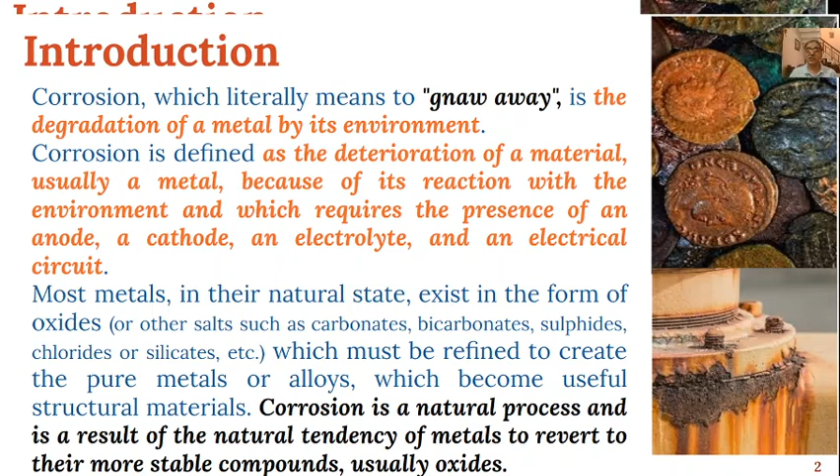In the refining process, the metal ore, which is a thermodynamically stable state, undergoes refining with energy provided to the system, which creates pure metals. But these pure metals are thermodynamically unstable compared to their ores. So with the passage of time, these metals undergo corrosion to produce corroded metals, because these corroded metals are a thermodynamically more stable state than the pure metal. That is why corrosion is a natural phenomenon which takes place in various types of metals.

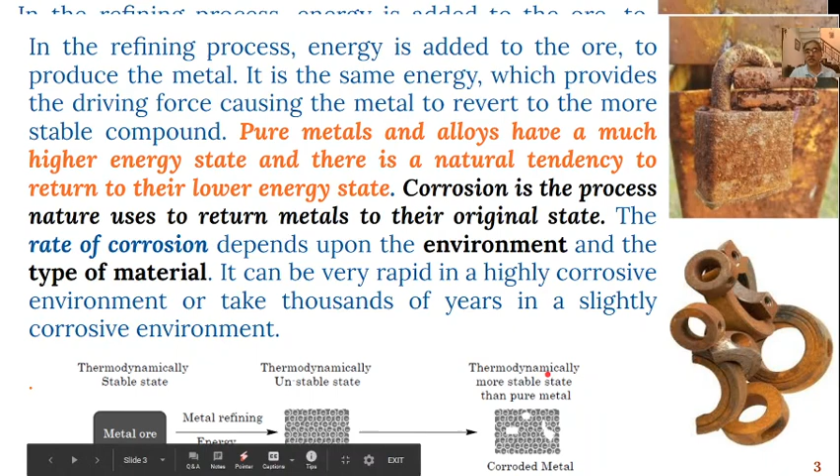Corrosion can be very rapid in a highly corrosive environment, or it may take thousands of years in a slightly corrosive environment. So how much time a metal will take to get converted into a corroded metal will depend upon the environment in which the corrosion reaction takes place, and it will also depend upon what type of metal it is.

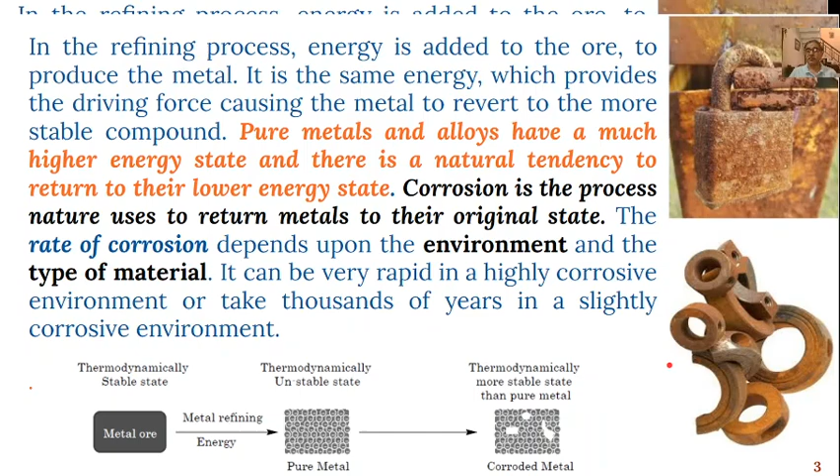Then, the economic impact of corrosion. Recently in 2019 in India, it has been said that corrosion and poor maintenance were the major causes of the toxic gas leak in the Union Carbide pesticide plant in Bhopal, which we all know as the Bhopal gas tragedy.

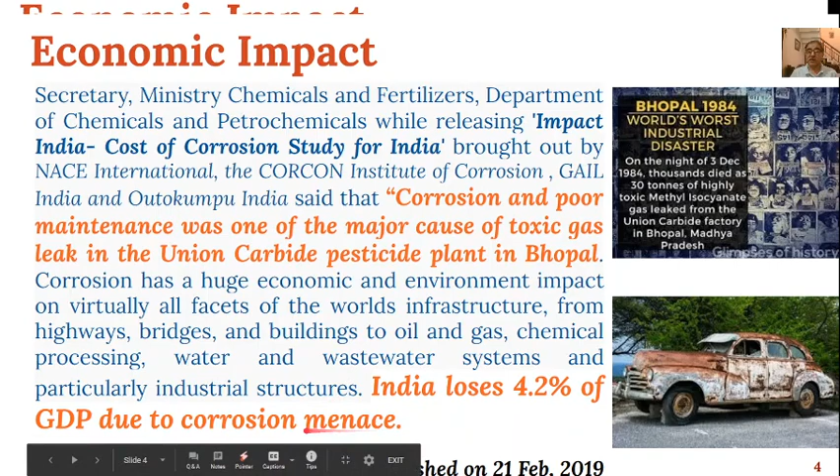Because of this, corrosion has a huge economic and environmental impact on virtually all facets of world infrastructure, from highways, bridges, buildings, to oil and gas, chemical processing, water and wastewater systems. India loses about 4.2% of its GDP due to corrosion, such is the high economic impact of corrosion on the Indian economy. Similarly, globally, it has been estimated that up to 5% of the world GDP is lost due to corrosion.

Then the causes of corrosion: mainly three types of corrosion take place. One is electrochemical corrosion, which we also call wet corrosion. Then chemical corrosion, which is known as dry corrosion. And the third category is acidic corrosion.

In case of electrochemical corrosion, it is similar to the phenomenon which takes place when a carbon zinc dry cell generates a direct current. Basically, in electrochemical corrosion, there must be present an anode, that is the negative electrode, a cathode, that is the positive electrode, and an electrolyte, which is the environment in our case, and then a circuit should connect the anode and the cathode, and only then the corrosion will take place.

So basically what happens is that the metal atom at the surface, due to the presence of moisture, undergoes oxidation to give us metal ions and electrons. These electrons, which are produced on the surface of the metal, are removed by the depolarizer. Depolarizer means the species which can accept electrons, and because of the acceptance of electrons by the depolarizer, corrosion is caused. The main depolarizers are oxygen and acid.

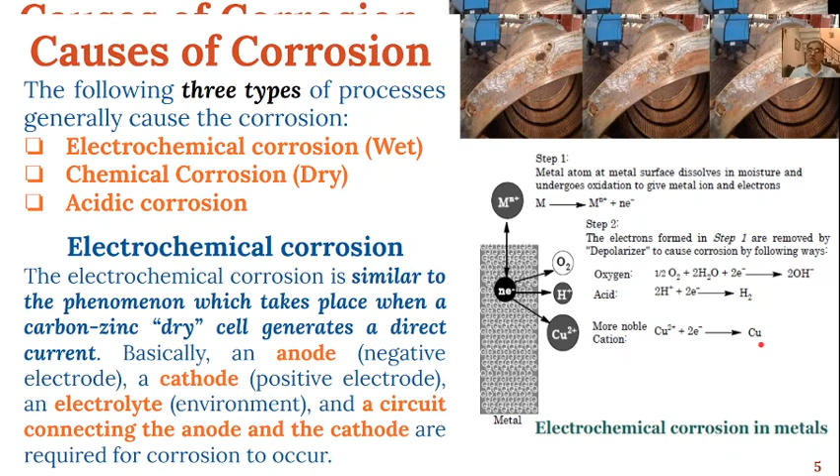Then in case of more noble cations, the electrons will be taken up by those more noble metals, and the metallic surface can be restored also.

The chemistry of electrochemical reaction is such that there must be a short circuit of the electrochemical cell present, only then can electrochemical corrosion take place, and dissolution of the metal will occur at the anode, whereas corrosion current enters the electrolyte and flows to the cathode.

For example, if we take the case of iron, when iron is exposed to corrosive or aerated water, the anodic reaction will be that iron metal changes into ferrous (2+) ions, producing 2 electrons. At the cathode, in the presence of oxygen and water, these electrons are converted into hydroxide ions. Since there cannot be any gain or loss of electrons, 2 atoms of iron must dissolve to provide the 4 electrons required at the cathode. So 2 atoms of iron metal produce 2 ferrous ions and 4 electrons, and these 4 electrons at the cathode produce 4 hydroxide ions.

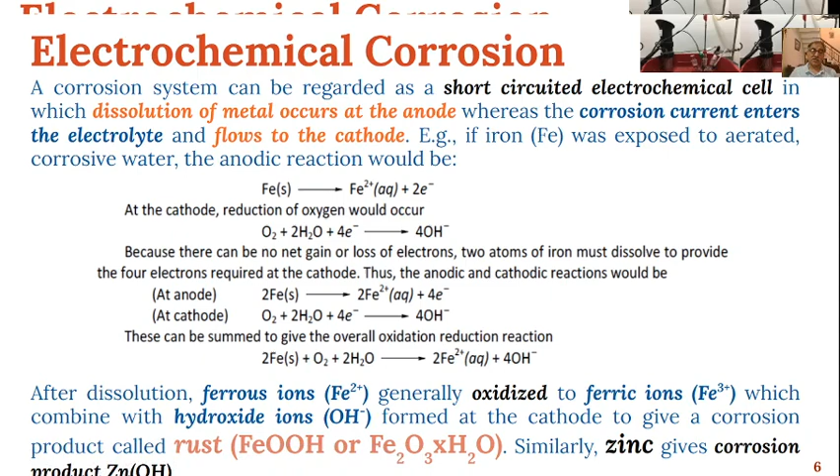Rust is the product of oxidation of iron metal. Similarly, zinc also undergoes corrosion to give zinc hydroxide as the product of corrosion.

Then there is chemical corrosion, or dry corrosion. Dry corrosion is mainly caused due to the direct reaction of metal surfaces with atmospheric gases present in the environment. The most common gases which interact in chemical corrosion are oxygen, carbon dioxide, hydrogen sulfide, sulfur dioxide, nitrogen, chlorine, and other halogen gases.

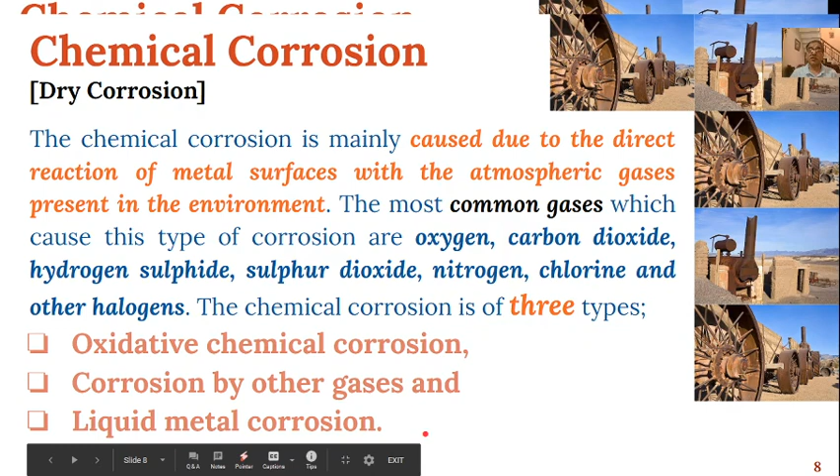This chemical corrosion is of three types: oxidative chemical corrosion, corrosion by other gases, and liquid metal corrosion. Oxidative chemical corrosion is caused by direct reaction of atmospheric oxygen with metals, generally in the absence of moisture. So in oxidative chemical corrosion there are no water vapors present, and that is why it is also called dry corrosion.

The metals which generally undergo this type of chemical corrosion are alkali metals and alkaline earth metals, which are quickly oxidized even at low temperatures, whereas all other metals except gold, silver, and platinum are oxidized at high temperature. So what happens is first the surface of the metal is oxidized, producing electrons and metal ions. These electrons interact with atmospheric oxygen to form oxide ions, and those oxide ions react with metal ions to give a layer of metal oxide at the surface of the metal, and hence corrosion of the metal takes place.

At the surface there will be formation of a layer of metal oxide, leading to a corroded metal. Then, when the entire surface of the metal is covered with metal oxide, further oxidation is restricted. This means if the metal oxide layer is a stable one, further corrosion will be restricted once the whole surface of the metal is covered with the metal oxide.

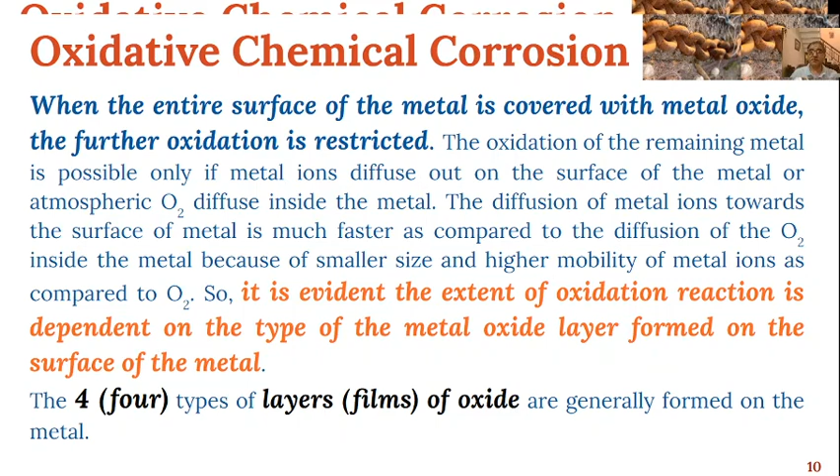It has been seen that generally there are four types of oxide layers which form on the surface of the metal. The first category is a stable layer. A stable layer of metal oxide means this layer is an impermeable coating on the surface of the metal, which restrains the penetration of atmospheric oxygen into the metal.

Once the metal oxide layer has been formed on the surface of the metal, no penetration of atmospheric oxygen can take place inside the metal, and corrosion will stop at that stage. The metals where this type of layer formation commonly takes place are aluminium, lead, copper, and tin. So the formation of a stable coating on the surface of the metal prevents further oxidation or further corrosion.

The second type is unstable oxide layers formed on the surface of the metal. In this type of layer formation, the oxide layer formed will decay to give metal and oxygen. So the metal oxide layer which has been formed, with passage of time, changes into metal ions and oxide ions again, and then metal is formed and oxygen goes back. This layer decays with time, and pure metal is generated back. Here the corrosion is a reversible process, in cases where the layer formed is unstable.

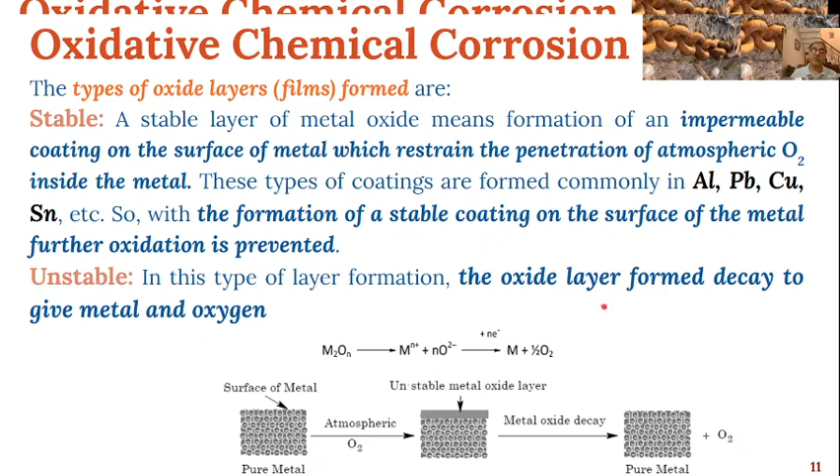Then third is where the layer is a volatile layer. In this type of oxide layer formation, after some time the layer volatilizes as soon as it is formed. That means once it has been volatilized, a fresh surface of the metal is exposed to further corrosion. So formation of a volatile layer of metal oxide causes rapid and continuous corrosion till the whole metal is corroded. This is a very severe type of corrosion.

An example is molybdenum oxide formation, which occurs in case of molybdenum metal. First, the metal reacts with atmospheric oxygen and forms a volatile metal oxide, which goes into the atmosphere, exposing another surface of the metal to further corrosion, and ultimately the whole metal will be corroded and destroyed.

Then the fourth category is porous layer formation. The oxide layer formed has pores through which atmospheric oxygen can pass through into the metal, penetrating the surface, and corrosion continues till the whole metal is converted into metal oxide. First, the pure metal interacts with atmospheric oxygen and a porous metal oxide layer is formed, and this goes deep into the metal. The quantity of metal oxide formation goes on increasing, and ultimately the whole metal is converted into metal oxide. This is also a severe type of corrosion.

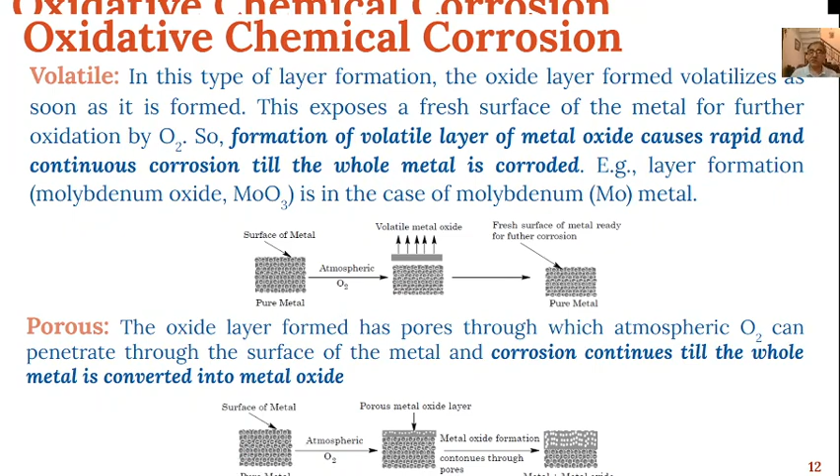The next topic is the Pilling-Bedworth rule. As we have seen, there are four types of oxide layer formations, and these can be categorized into protective or non-protective oxide layer formation in case of metals. This is governed by a rule known as the Pilling-Bedworth rule.

According to this rule, if the volume of the oxide is equal to or greater than the volume of the metal from which it is formed, the oxide layer is non-porous and therefore protective in nature. When it is non-porous, atmospheric oxygen cannot penetrate through the surface of the metal, so this will not lead to further corrosion. Therefore, this layer is protective in nature, and such a layer is found in case of oxides of copper, indium, aluminium, nickel, and chromium.

Similarly, if the volume of the oxide is less than the volume of the metal from which it is formed, then the oxide layer is porous and will be non-protective in nature. This means the oxide layer formed will be porous, and atmospheric oxygen will get into the metal, and the volume of the oxide layer will go on increasing. Ultimately the whole metal is destroyed, and this type of layer formation takes place in case of alkali metals and alkaline earth metals. This rule is known as the Pilling-Bedworth rule.

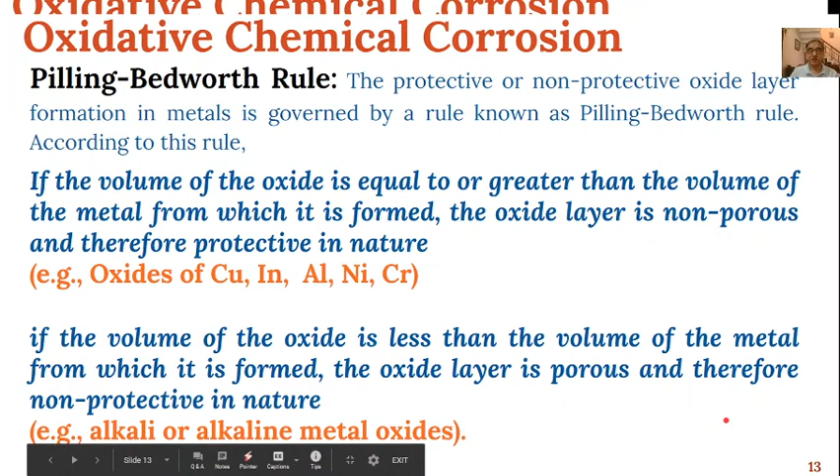Then corrosion by other gases. This type of corrosion is caused by gases other than oxygen, like carbon dioxide, H2S, sulfur dioxide, nitrogen, chlorine, and other halogens. All these gases can also cause corrosion to the metals. But the extent of corrosion depends on the affinity between the gas and the metal, and what type of film is formed on the surface of the metal, whether it is protective or non-protective, porous or non-porous.

In these types of corrosion, the extent of corrosion decreases if the layer formed is protective or non-porous. An example is the attack of chlorine gas on silver metal. This forms a non-porous layer of silver chloride, which is a protective layer, and it protects the silver metal from further corrosion.

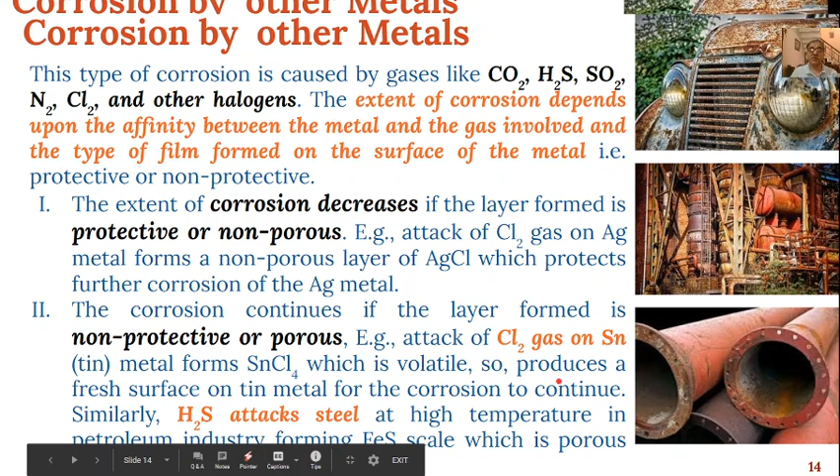Corrosion continues if the layer formed is non-protective or porous. The attack of chlorine gas on tin metal is an example of this type of corrosion. Here, the metal reacts with chlorine gas to form SnCl4, which is a volatile substance. It goes into the atmosphere and produces a fresh surface on the tin metal, and corrosion continues till the whole metal is destroyed by corrosion.

Then is liquid metal corrosion. Liquid metal corrosion is caused due to chemical reaction of solid metal with a flowing liquid metal at very high temperatures. So such type of corrosion is caused by these flowing liquid metals, and it always takes place at high temperature. An example is such corrosion takes place in case of nuclear power production.

So these are the factors which affect liquid metal corrosion: temperature, temperature gradient, cyclic temperature fluctuation, then surface area to volume ratio between the solid metal and the flowing liquid metal. Then chemical purity of the liquid metal which interacts with the solid metal. Then flow velocity, surface conditioning, other material in contact with the same liquid metal, and condition of the container material. So all these factors determine the extent of liquid metal corrosion.

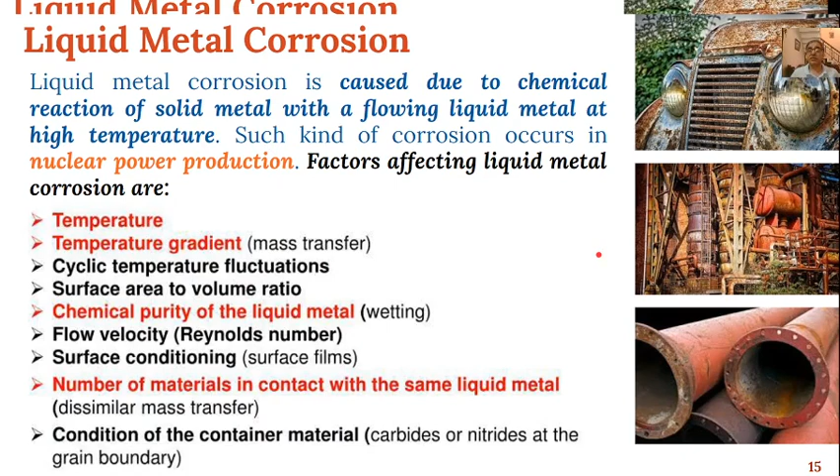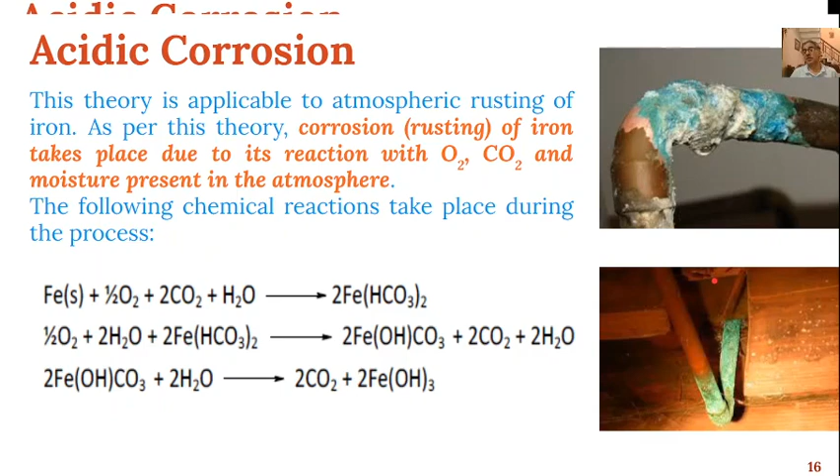First the iron metal interacts with oxygen, carbon dioxide and moisture present in the atmosphere, and this is converted into ferrous bicarbonate, which is further oxidized to give hydroxycarbonate, which hydrolyzes to give ferric hydroxide and carbon dioxide. This leads to the formation of rust on the metal, and this is called acidic corrosion. You can see these are the iron hydroxide type rust formed on the surface of the metal.

Then forms of corrosion. There are many types of corrosion. Broadly this can be classified into these few types: general corrosion, localized corrosion, metallurgically influenced corrosion, mechanically assisted corrosion, and environmentally induced cracking. Out of all these types of corrosion, a few are very severe.

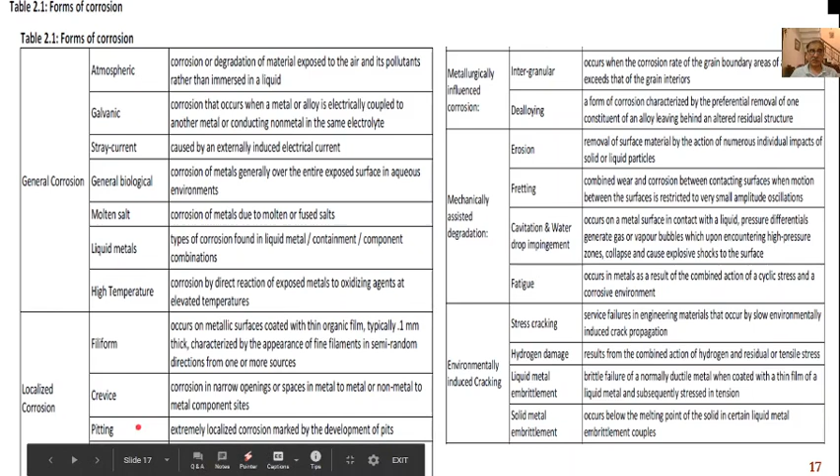For example, galvanic corrosion is very important. Then liquid metal corrosion, which we have discussed, is very important. Then pitting corrosion, crevice corrosion, these are also very important in mechanical industries. Then cavitation and water drop impingement, this is very important. Stress cracking is very important, a very severe kind of corrosion. So we will discuss all these types of corrosion one by one.

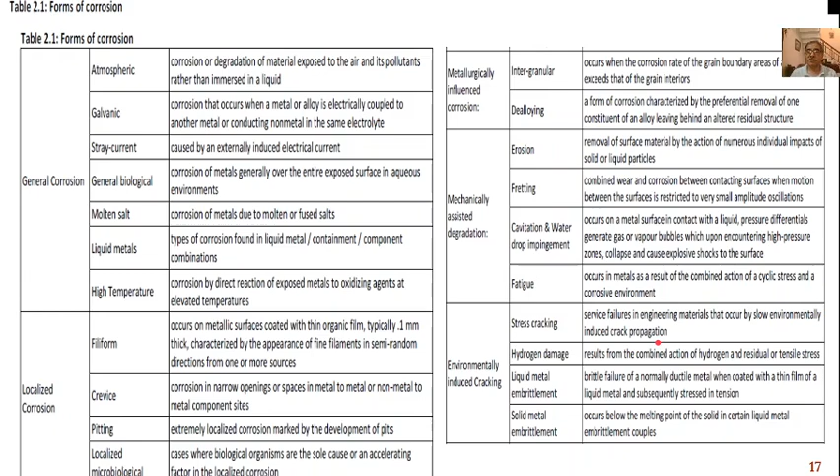First is galvanic corrosion. This is the most common type of corrosion, also known as bimetallic corrosion. This corrosion occurs when two electrochemically dissimilar metals, say zinc and copper, are metallically connected and exposed to a corrosive environment. Then what happens is the less noble metal acts as anode and undergoes corrosion, and the more noble metal acts as cathode, and an electrochemical cell is generated to cause this type of corrosion, which is called galvanic corrosion.

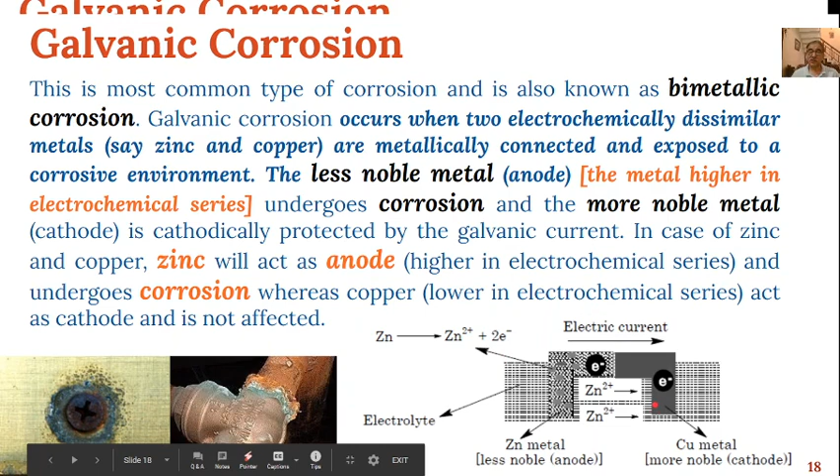So here what happens is that zinc metal, which is less noble, acts as anode, and this is converted into zinc 2+ ions, and electrons are produced. Then copper metal acts as cathode, and electrons pass on to it, and an electrochemical cell is completed, which leads to corrosion in such reaction conditions. This type of corrosion is called galvanic corrosion.

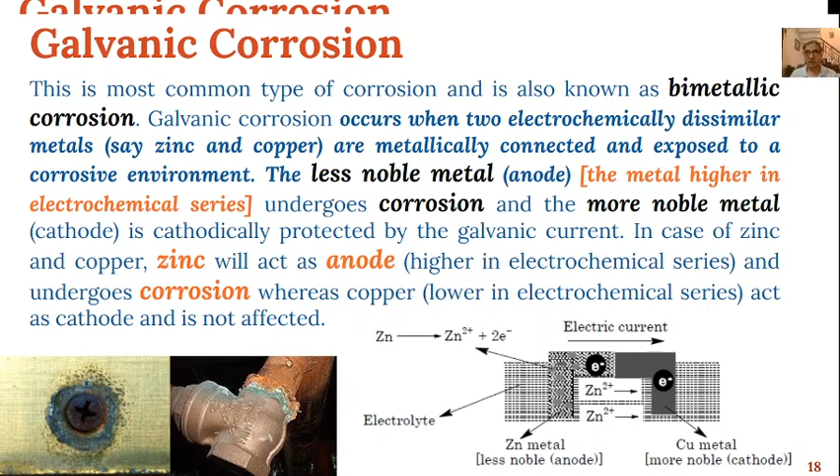Then there is galvanic series. It determines the nobility of the metals and semi-metals. So basically it means the tendency of a metal to undergo corrosion in a galvanic cell with respect to other metals, that is called galvanic series.

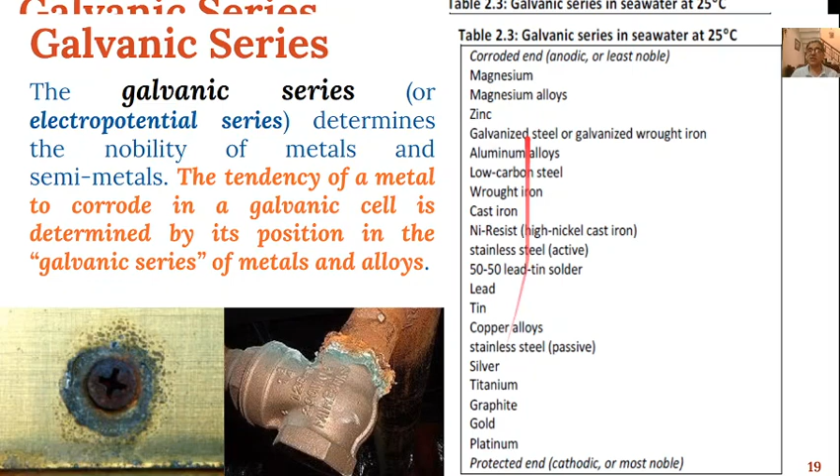So we can say that platinum, gold, graphite - as we move from this to this, the extent of corrosion goes on increasing. So if we are having, say, zinc and lead, zinc is more likely to be corroded in comparison to lead. So the extent of corrosion among the metals goes on increasing as we move from lower side to upper side. This is the corroded end - here this will be most significantly acting as anode, and this will be most significantly acting as cathode. So such a series is known as galvanic series.

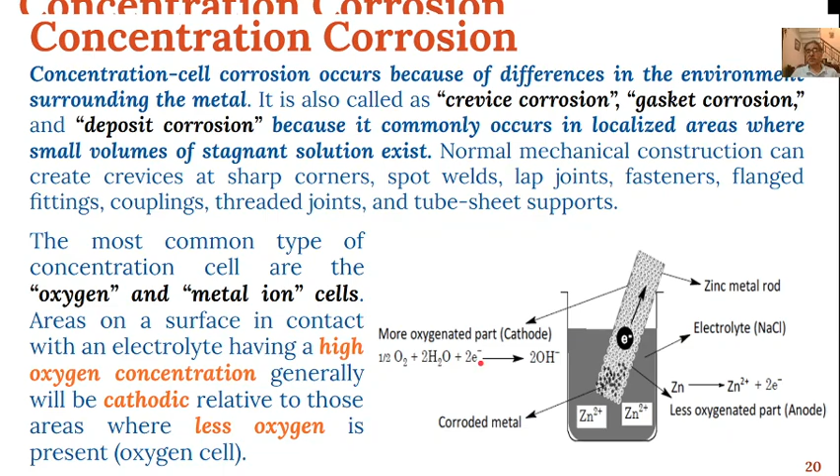So the most common type of concentration cells are oxygen or metal ion cells. Here again, because of the different concentration of oxygen at different parts of the metal, this will lead to the formation of concentration corrosion.

Then is pitting corrosion. Pitting corrosion is a randomly occurring, highly localized form of attack on a metal surface, characterized by the fact that the depth of penetration is much greater than the diameter of the area affected. You can see here the depth is much more than the area of the surface of the metal. So such a type of pit is formed due to this corrosion, that is why the name pitting corrosion.

This is one of the most destructive forms of corrosion, which selectively attacks an area of the metal surface where there is a surface scratch or an emerging dislocation or a compositional heterogeneity, which results in the formation of a hole. Steel and galvanized steel pipes and storage tanks are susceptible to pitting corrosion by many potable waters.

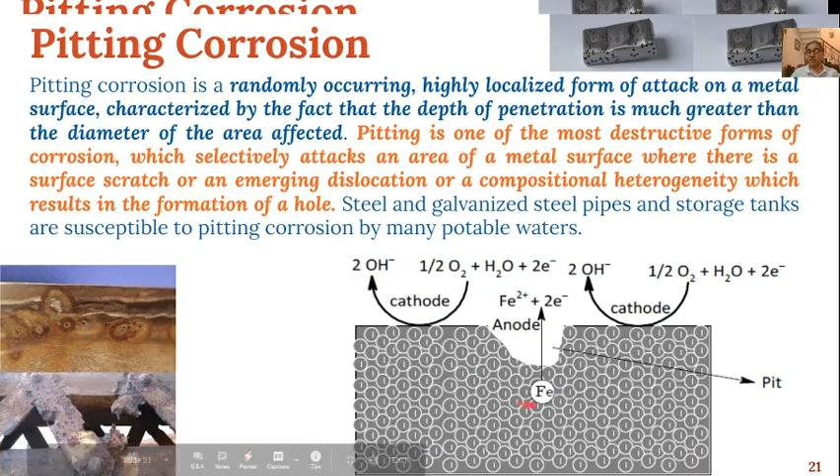So here what happens is, at that point where there is a compositional heterogeneity, or a scratch or some dislocation, this metal will act as anode, and on reaction with oxygen and water in the atmosphere, these electrons will produce hydroxide ions, and these hydroxide ions will interact with Fe2+ ions, and a pit will be generated due to corrosion.

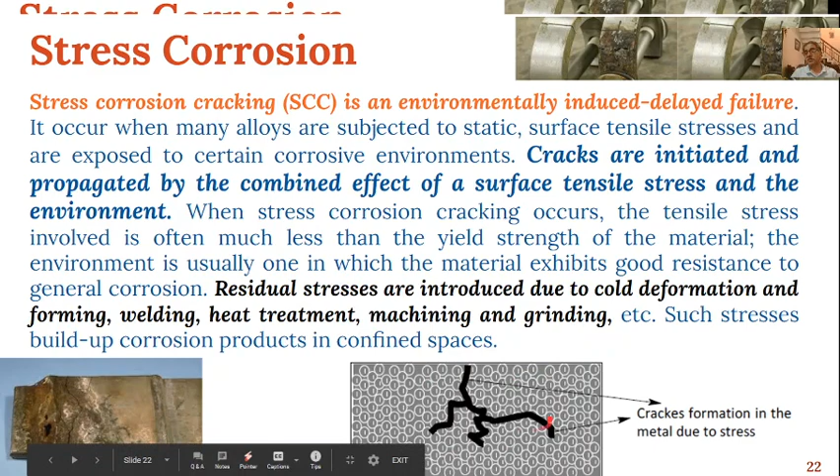Residual stresses are introduced due to cold deformation and welding, heat treatment, machining and grinding, etc., and these types of cracks are generated due to this stress in the metal surface.

This is a classical disastrous form of corrosion, and failure may occur unexpectedly. The catastrophic nature of this severe form of corrosion attack has been repeatedly illustrated in many newsworthy failures. The most important examples of stress corrosion include: one, the swimming pool roof collapse in Switzerland in 1985, due to stress corrosion, and the cracking of the roof took place because of stress corrosion, where 12 people were killed and 19 people were injured.

Similarly, there is a very important crash of a Boeing 747 in the Netherlands in 1992, also caused by stress corrosion. There, 43 people died due to the crash of this plane, caused by pit corrosion and stress corrosion, both occurring in the engine of the Boeing 747. So we can judge the severity of this type of corrosion.

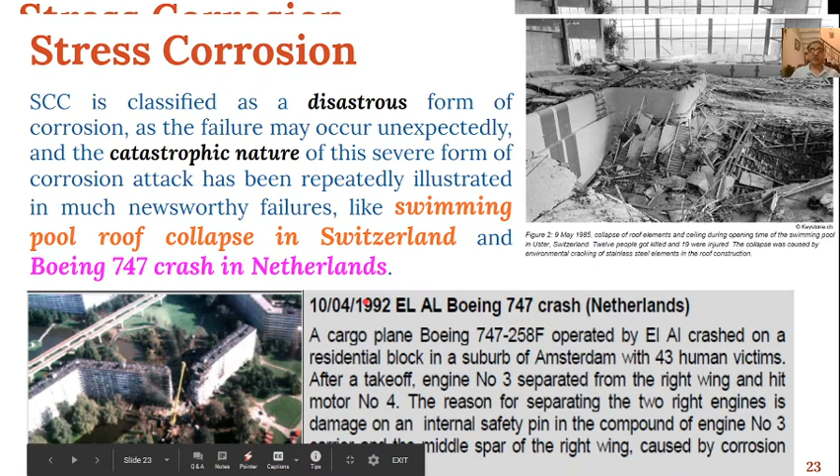Stress corrosion can be of many types. One is chloride stress corrosion, the most important form of stress corrosion, generally seen in the nuclear industry. Here, intergranular corrosion occurs in stainless steel under tensile stress in the presence of oxygen, chloride ions, and high temperature.

The reason is chromium carbide deposits along the grain boundaries that leave the metal open to corrosion. This can be controlled by maintaining low chloride ion and oxygen content in the environment, and by the use of low carbon steels. So this kind of stress corrosion can be avoided.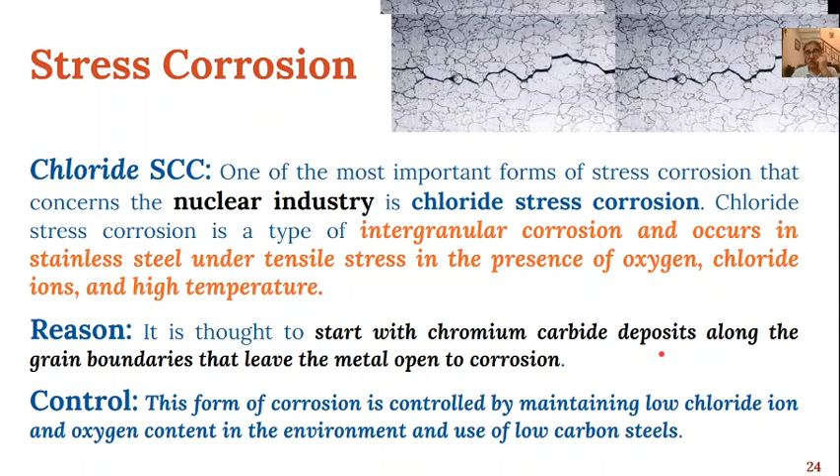Then is caustic stress corrosion, also called caustic embrittlement. This is a very common form of stress cracking corrosion, and it occurs in mild steel at high temperatures under alkaline conditions, generally found in steam boilers and heat transfer equipment.

Here what happens is the water present in steam boilers and other heat transfer equipment becomes alkaline due to the hydrolysis of sodium carbonate. Sodium carbonate interacts with water to give sodium hydroxide and carbon dioxide, and due to the presence of this sodium hydroxide, water becomes caustic, and the concentration increases as the water evaporates.

This concentrated soda attacks the boilers by dissolving its iron as sodium ferroate. This sodium ferroate is converted into ferric oxide, and ultimately we get sodium hydroxide, and embrittlement of the mild steel takes place.

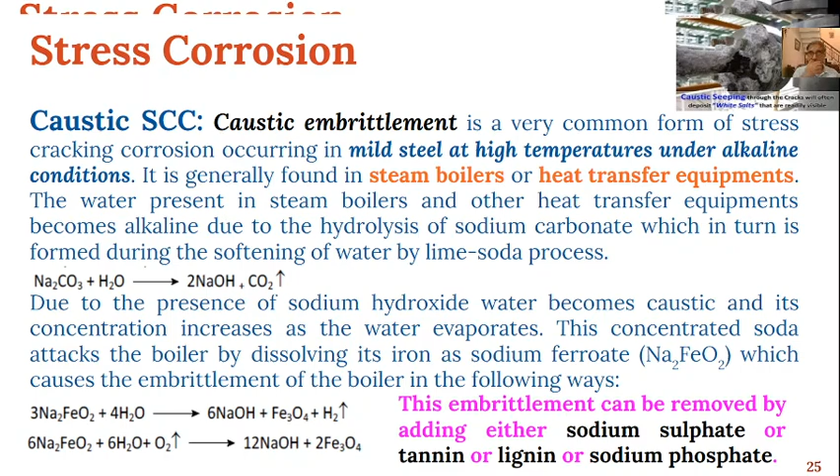This embrittlement can be removed by adding sodium sulfate, lignins, sodium phosphate, or tannins. If any of these is added, this type of embrittlement can be removed, because these substances will not allow sodium carbonate to interact with water to form sodium hydroxide. Instead, they will form a complex which removes this type of corrosion.

Then is brass stress corrosion. This takes place generally in presence of organic amines or ammonia. The reason for this type of cracking is formation of complexes by the brass components with organic bases.

In brass, copper and zinc are present, and these react with ammonia to form copper ammonium complexes and zinc ammonium complexes, which leads to dissolution of brass and hence formation of cracks. Such crack formation is called brass stress corrosion cracking.

This can be prevented by proper designing of the equipment with right materials, reduction in stresses, removal of critical environment species such as hydroxide, chlorides, and oxygen from time to time, and avoiding stagnant areas and crevices in heat exchangers where chloride and hydroxide might become concentrated. We have seen in our homes that these types of brass corrosion take place.

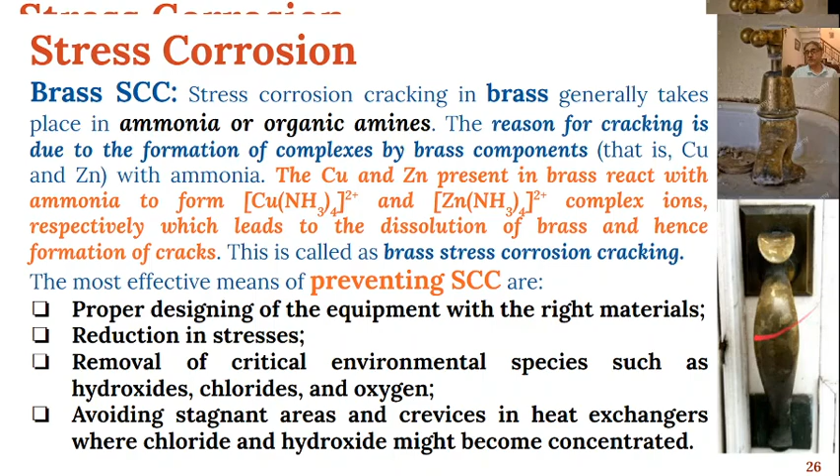Then is waterline corrosion. When water is stored in a metallic tank, it is observed that the metal below the waterline gets corroded. This is because water below the waterline has less amount of oxygen compared to the amount of oxygen present in the atmosphere.

Because of that, the water below the waterline will act as an anode, and the metal above the waterline, being highly oxygenated, will act as a cathode. So because of the presence of anode and cathode within this system, corrosion will take place, and such corrosion is called waterline corrosion.

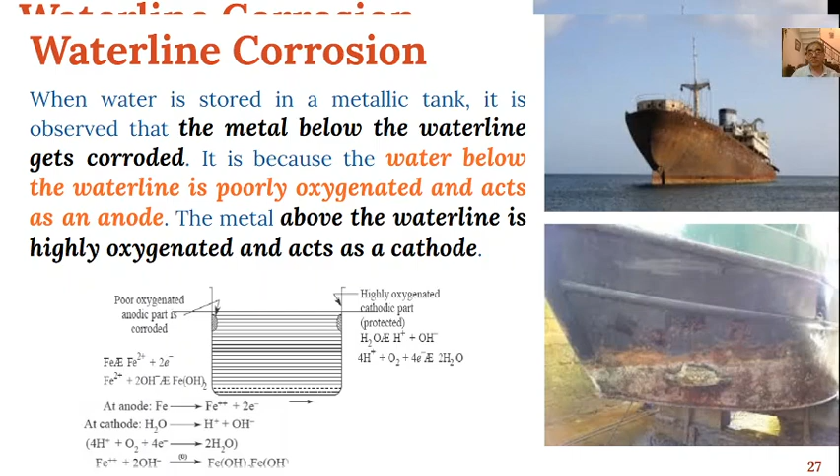At the anode, iron changes into Fe2 plus, and electrons are generated. At the cathode, water gives H ions and OH ions, and these H ions interact with oxygen and electrons produced at the anode to give water. Overall, the Fe2 plus ions interact with the hydroxide ion formed, and rust is formed from this type of corrosion, called waterline corrosion.

The next topic is passivity or passivation of metals or alloys. This is defined as a relatively inactive state in which the metal or alloy displays a more noble behavior than thermodynamic conditions predict. Basically, passivity means the reason why the metal does not corrode when it should.

We know that corrosion is a natural phenomenon, but we have seen cases where the metal has not corroded whereas it should have been corroded. So passivity is a state in which a metal or alloy exhibits much higher corrosion resistance than expected from its position in the electrochemical series. Such a thing is called passivity or passivation of metals.

The first correct account of passivation of iron was given by Michael Faraday in 1836, when he reported the formation of an oxide layer on the surface of iron.

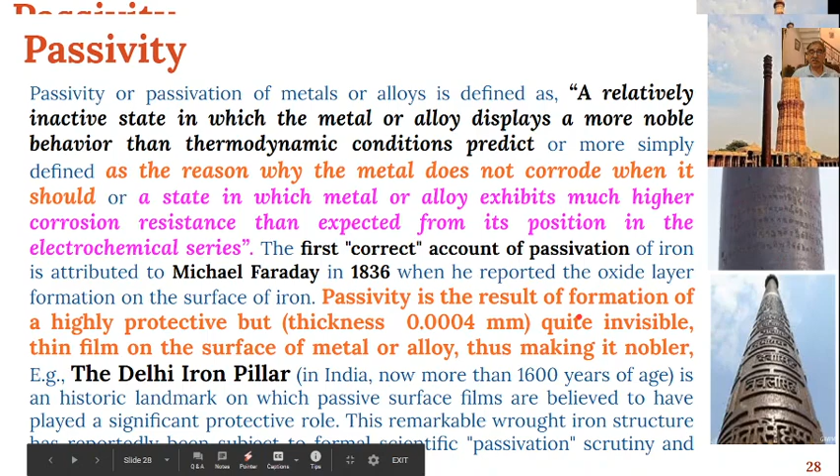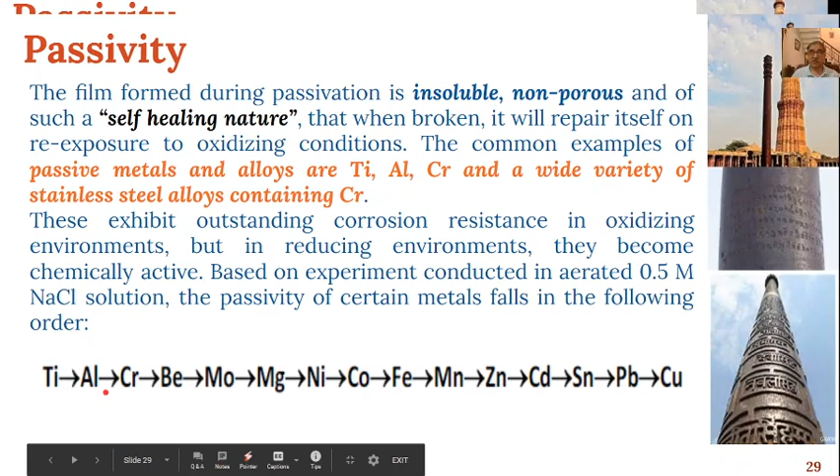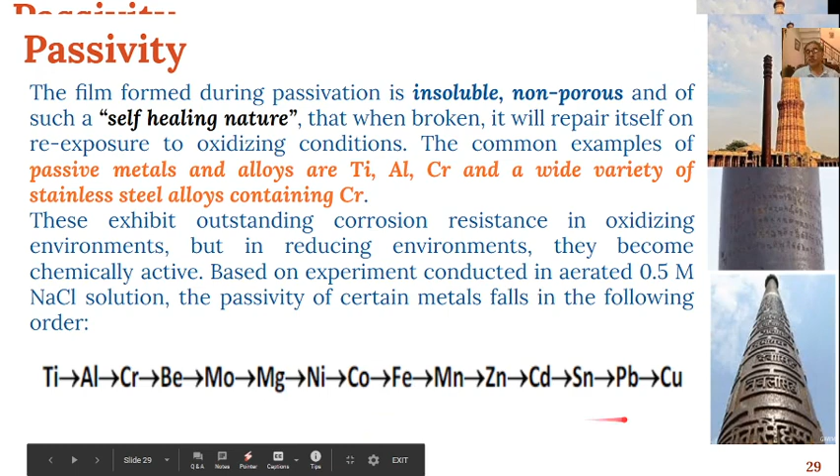The film forming during passivation is insoluble, non-porous, and has a self-healing nature, and because of that corrosion does not take place. Common examples of passive metals and alloys are titanium, aluminium, chromium, and a wide variety of stainless steel alloys containing chromium. The order of passivity of different metals is: titanium is most passive, then aluminium, then chromium, beryllium, molybdenum, magnesium, nickel, cobalt, iron, and so on. As we move down, passivity goes on decreasing.